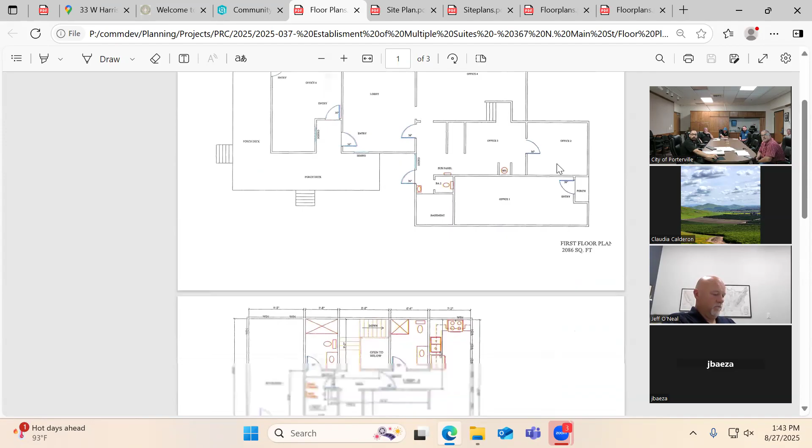Counselor? Yeah, so 1, 2, 3. I know you wanna do residential in the future upstairs. Right. Like I mentioned to you earlier, it will require a rating based off what the code states. I believe it's a 2-hour rating between the commercial downstairs and the residential upstairs.

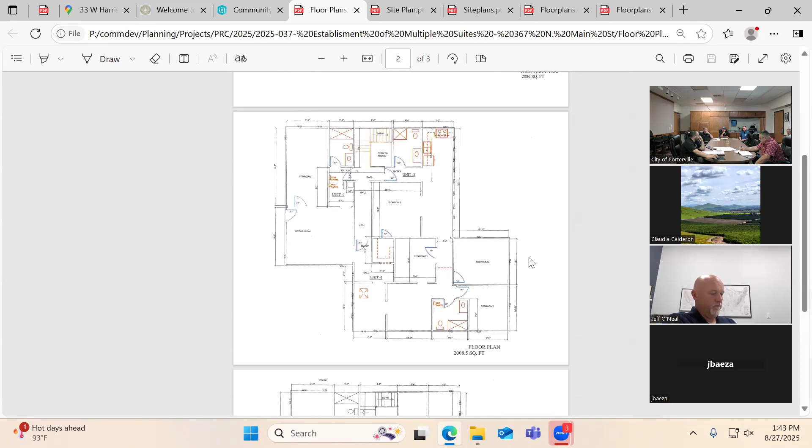Javier, will you help me remember, if he puts 3 residential units upstairs, is he not required to have accessibility? Is it 4 or more? No, it's 3 under the covered roof. Oh, it is 3. Yeah, 4 is for condos.

And then it'll all come down to a hardship analysis on that. So it'll have to be just 2 residents, 2 homes upstairs. Yeah, either put 2 units, or 3 could require you to make it accessible depending on the cost, like he's saying, there may be a hardship waiver. Well, so you could do a waiver?

It'll be a 2... I think when Javier mentions hardship, how much money are you gonna put into making this residential? And then after you get that number, how much is it gonna cost for you to get accessibility to the upper floors, right? Elevator, a lift. There's a few other options in the code. If it's way more money than what you're putting into it to make it residential, then there's a hardship form you can fill out.

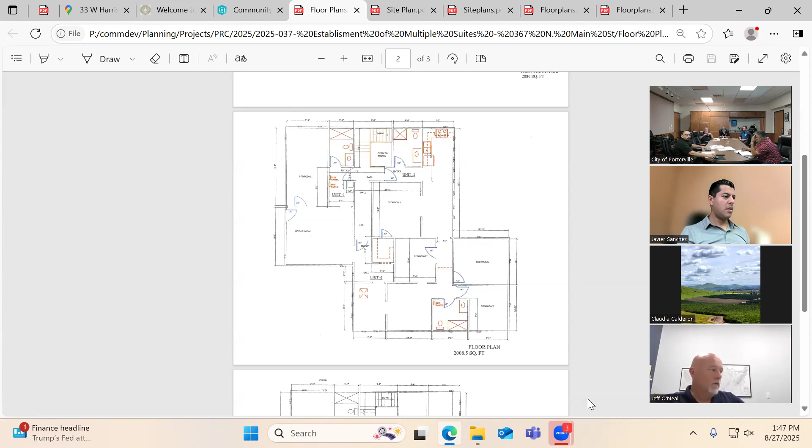Okay, got it. So there might be some examples around town you could look at. I know there was the LULA that was put in for the tax office. LULA is a limited use, limited access elevator. It's not big enough to fit a stretcher, so you have to have a stairway that's accessible with a stretcher, with certain dimensions to get a stretcher up and down. But then you'll have an elevator big enough for a person in a wheelchair, maybe two people, sometimes three, could get in there and go up.

And what they did is they attached it to the exterior of the building. So there are some options that may be affordable. They just did it for a business office, and they were able to get it done. What's the location? That's going to be on Villa and Putnam.

Yeah, if you look at the back wall, you can see the elevator shaft. Go to Villa and Putnam. Yeah, even though they're a whole lot cheaper, but that's too expensive, man.

Well, and like I said, these guys were able to do it just for a business office and it worked for them. They actually put the accessible stairwell on the exterior. Yeah, but that's a little different though, no? Because it's a business upstairs. Well, yeah, but I mean, you say it's just like what you have, it's just a house. They just framed that up and there's a small elevator inside there, and that door is just the elevator room.

And then the stairs, you can see it off of Villa. You can see it better off of Villa side. That cost them what, about 100,000? I have no idea. I don't know the valuation, he would know what the valuation of that project was or could get it, but there's the accessible stairwell right there.

And the reason you've got to have accessible stairs is if there is an emergency, the fire department has to be able to get a fire department stretcher up there. Accessibility stairwell, okay. But if your interior stairwell meets those dimensions, it's fine. They just didn't have an interior stairwell.

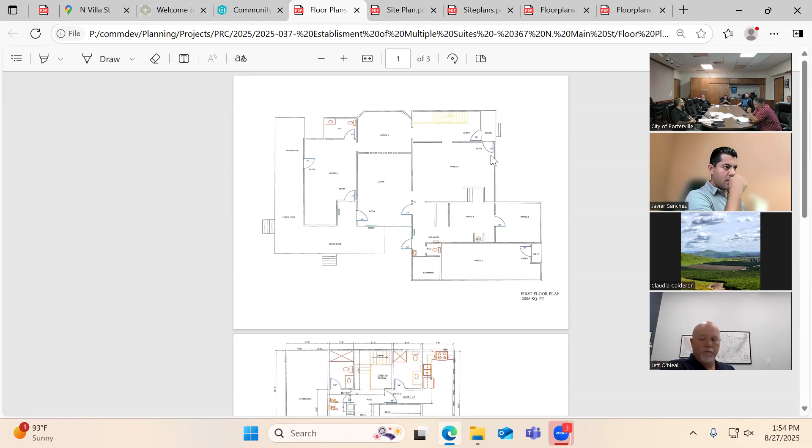Yeah, we'll see what's going to be required, or how much more will it be required to do a 3 instead of a 2. So if it's going to be a whole lot more, well then... So, yeah, I'll deal with it, but if it's about the same, or if there's a way of keeping the requirements the same, whether it is 2 or 3, well then I'd rather go with the 3.

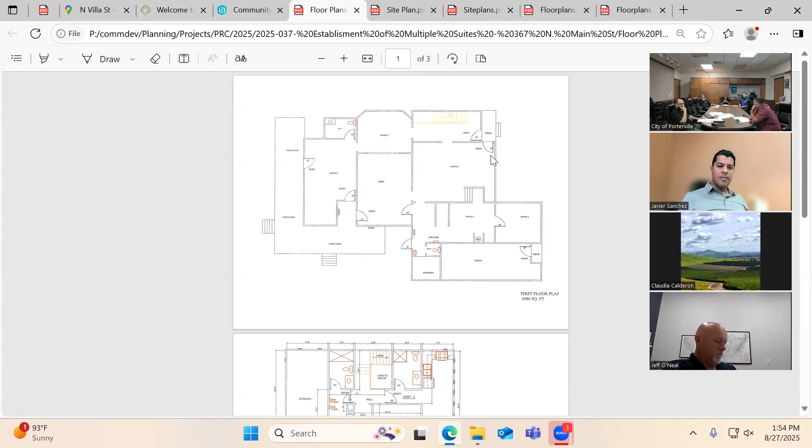Yeah, because there is an option in the code to put in a lift, like a stair lift, chair lift kind of thing. Oh, well then, yeah, we'll do that. You see them at bars or big cities, there's like a chair right there, and then it just has a rail that goes up and they ride it up and then they can get off at the top.

Usually that's an exterior feature, or they have a lift to where it's interior and you set it and you kind of ride up gradually. So yeah, there's some options. I would send you those code sections to help for you and your designer. Yeah, because I would like to get going on that right away.

Yeah, because I got a lot of people, a ton of people calling. But for now, if you want to get the downstairs going, then just comply with the building code. I mean, the permit for filling in the doors and the openings and the parking stuff, to at least at a minimum get the first floor rolling.

And technically, to get tenants in there right now for the commercial on the first floor, fire sprinklers are not required to do that. However, once they get installed, you have displacing your clients and stuff like that for the time being while the work is done.

But ultimately, that's not a requirement to occupy that space downstairs with commercial. The trigger for sprinklers comes when somebody's gonna be sleeping in the building. That's my main concern, getting it occupied. Because right now, the only people occupying it are homeless people.

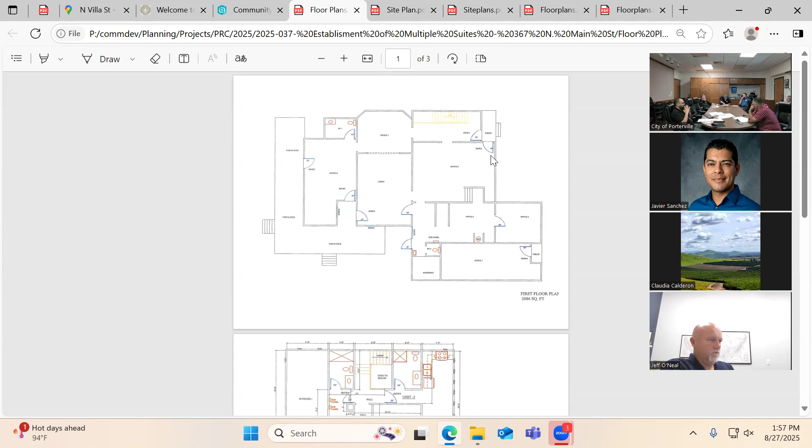Well, we would need the permit, the plan submitted for how it is now versus what you want to do, to separate the suites. Well, right now the suites at the bottom, well, that's the thing, the way we're gonna separate them, that's the way they're gonna be. So you want the plan the way I showed you submitted, that way you can start the construction to actually do the physical separations.

But once you have that permit, I don't think there's anything at that point. Because they'll also have to identify the suites, right? Because we'll need to know, are you going with 1, 2, and 3, or A, B, and C? What are they gonna be considered? So we'll need that stuff identified.

Yeah, because I'm paying $3,000 a month and then no tenants. So the swing is like 10 grand a month. So I think that's the fastest way, get the plan in, pull the permit, and on the plan identify, hey, we're gonna be blocking off this door, closing up this wall, whatever it is, to separate them. They're gonna be suites A, B, and C, or 1, 2, and 3. That's on the plan, and I'm gonna go with a B occupancy or something like that that's consistent. And I don't think there's really any issue.

And that gets you basically into our system. It's on record, business license now, everything's on record. The city has allowed you to turn this into 3 suites. And then you've got like 6 months to final out the building permit.

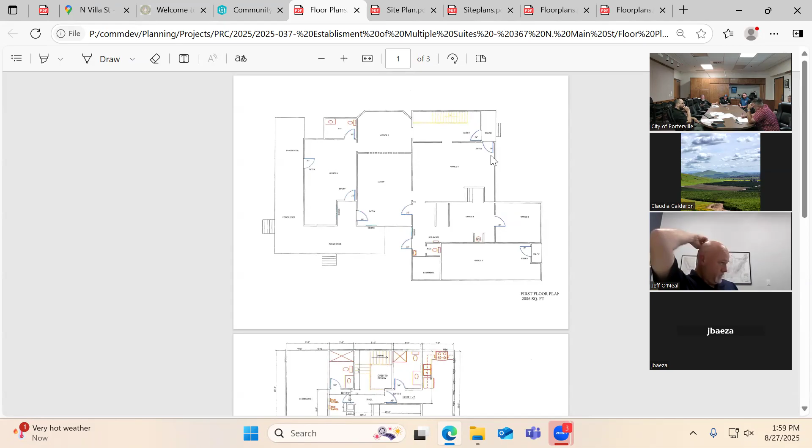People like, I think the quickest thing is talk with your designer, have them get that plan, it's a very simple plan. And then once Javier approves that, we approve it, you get the permit. It's as quick as, hey, if I get these blueprints in, let's say by next Tuesday or Wednesday, how soon will I be able to allow the tenant to move in there?

Well, once the permit gets issued, then you can start doing the work, and we can inspect it as it progresses. There is nothing that says he can't have a tenant in there while he's doing the work separating those suites. So if we issued it, let's say you get it to us by Tuesday or Wednesday, it takes us a week or two to review it, and then we issue you the permit. The same day you go over there with the green card permit, the issued permit, your tenant could be moving in.

Now, they may have to be disrupted while you're framing in that wall to separate them from the other suite, but your construction crew can go in at night and handle that too. Since you've got an active permit, you can coordinate with the tenant: hey, you guys close at 5, cool, I'll have the guys work from 5 to 9, and then come at 5 in the morning and work till you guys open. It shouldn't take that long.

There's nothing that says they can't be there, because you're not doing massive structural changes or huge supports where it's dangerous for someone to be present. You're basically just doing some framing, drywall, and painting.

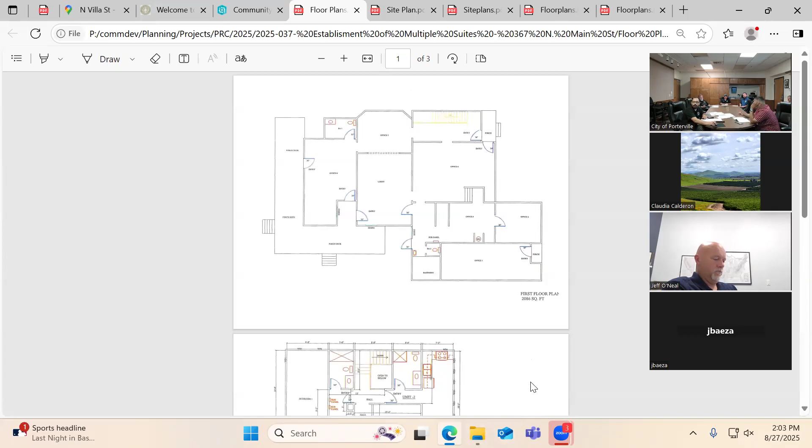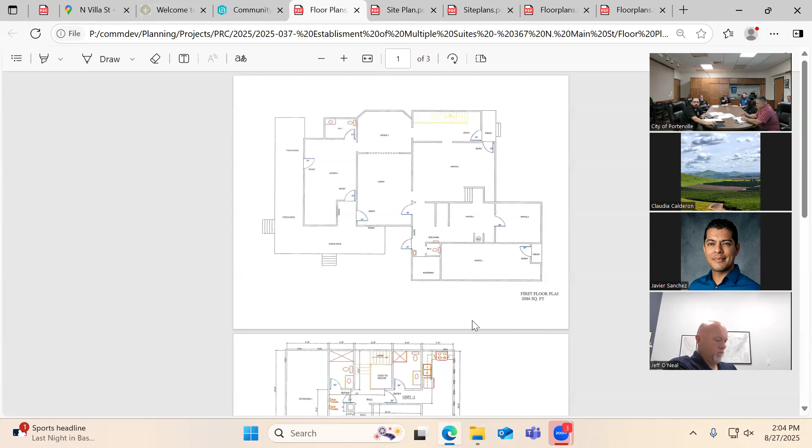Sounds good, moving along with engineering, Javier? For engineering, it depends on how much is spent. We'd evaluate frontage improvements like the drive approach and street lights, they add up quick, so if your remodel isn't too much, you may not be on the hook to do any public improvements. That's all engineering would have.

Thank you, Javier. Next with Public Works, starting with Briana. I don't have any comments. Thank you. This would be residential can service or commercial can service. Commercial cans, okay, thank you. Next with Joe. No comment from streets. Thank you. Next with the police department, with Mark. No comments. Thank you, Mark. And that is all comments.

Oh, no, sorry, David, any comments regarding the water utilities? Yeah, with this being a commercial facility and being in alignment with our new 2025 cross connection control plan, it would need a backflow device on the water service just after the meter. That would be my only comment. Thank you, David.

With that, we'll compile each department's comments in a letter to be sent out to the applicant in 2 to 3 weeks from today's date. Are there any additional questions from the applicant at this time for the city staff? No? Alright, well, we're good. Thank you for the application.

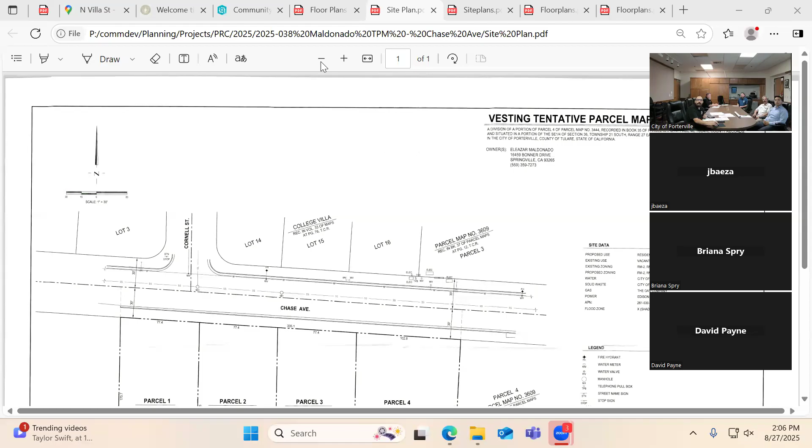All right, so we have the applicant proposing a preliminary residential parcel map to subdivide the existing 1.34 acre property into 4 total parcels for the development of a future multifamily residential project. The property site is located on Chase Avenue, approximately 500 feet west of Plano. The property is split zone with...

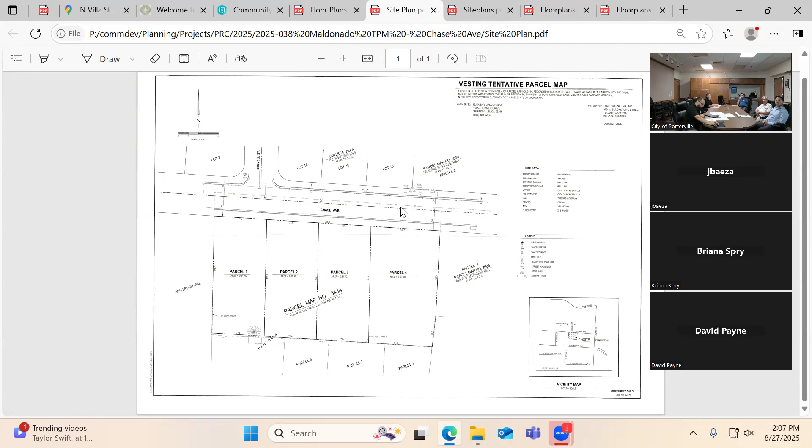RM2 medium density residential and RM3 high density residential. And with the zoning here, so we could go. The zoning here. So yes, the project site is located at APN 261-030-082.

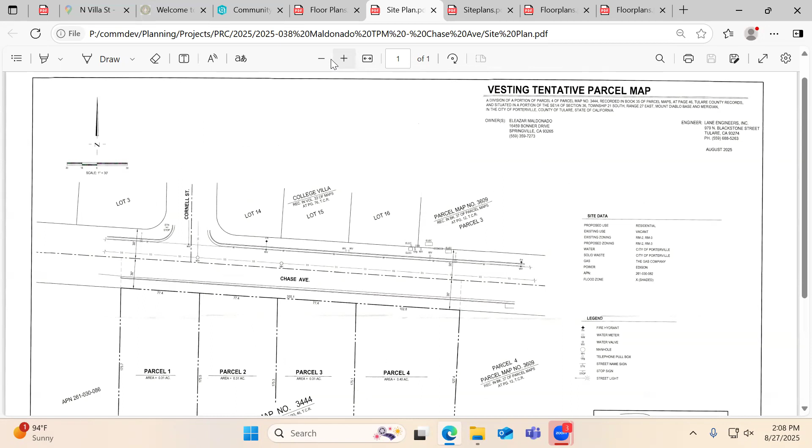As far as comments from planning, the project will require to process a tentative parcel map complying with chapter 402. The tentative parcel map shall be prepared by a registered civil engineer and/or licensed surveyor. There are fees associated with the tentative parcel map. The tentative parcel map fee is $1,500.

It will require an environmental assessment of the project. We can make a preliminary determination for an exemption, in which staff will prepare the notice of exemption for a fee of $79. It will require the environmental document to be filed with Tulare County clerk, and there is a fee of $58 for that.

This project will require parcel map committee, which is a public hearing, in which we'll notify - we'll send a notice to the newspaper and also mail out the notice to the adjacent properties within a 300-foot radius. City can prepare that service for $26.50. I believe you've excluded that already, but in the future, if that changes, we can always provide that service.

Now, once the tentative map is approved, it is good for up to 24 months unless the applicant requests an extension. The tentative map will require a final map, and that fee is $955.

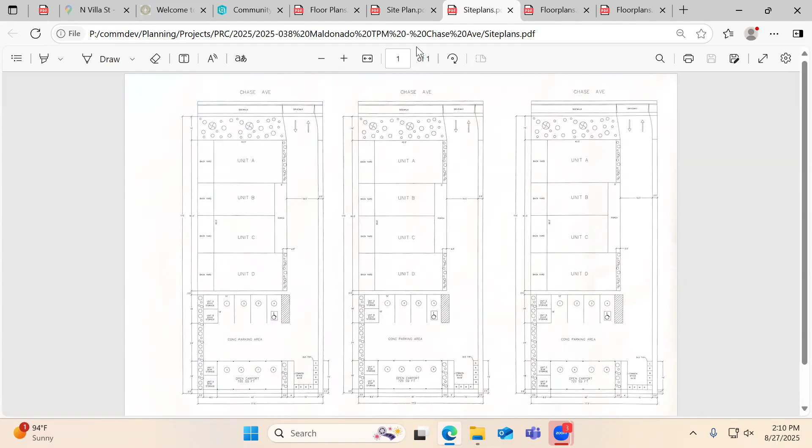Now, you are showing preliminary development of 3 of the parcels, not the 4th one. Are we leaving the 4th parcel not developed? Or would we be mirroring something similar? The larger parcel is probably going to consist of 12 units. If the setbacks and confines allow for it, but as far as the parcel size, based on the zoning, it should accommodate 12 units.

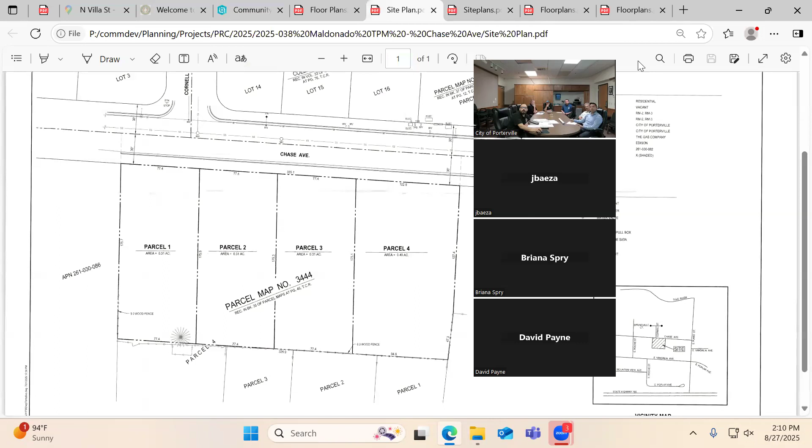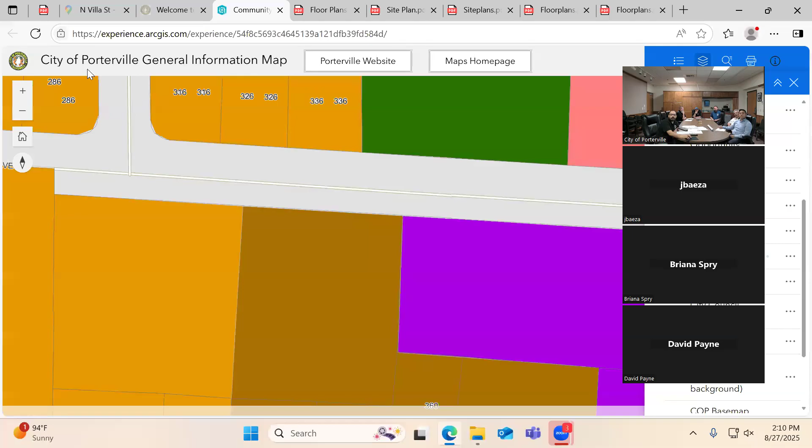Okay, so we're trying to phase into it. Just funds, for sure. Let's see, 0, 2, 1. So I want to see where more or less that zoning changes.

One question, Jeff - would we require the parcel lines to be at that change in zoning? So it looks like half of what would be parcel 3 is going to be medium density, and the other half is going to be high density. As part of the land division, would we require those parcel lines to line up with the zoning?

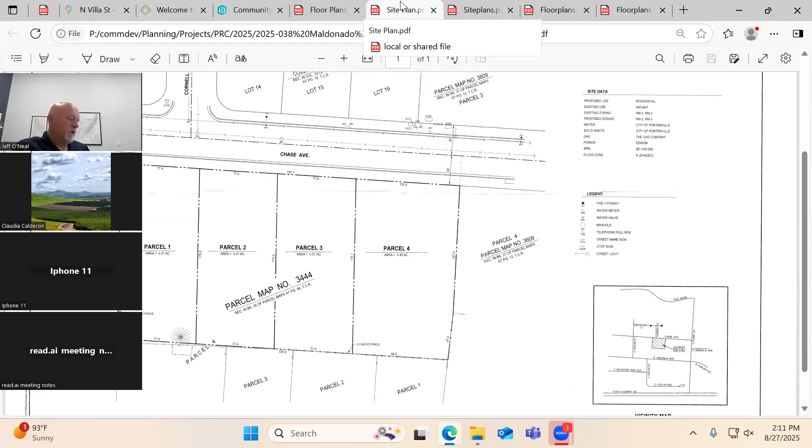I don't think so off the top of my head. We'll do a circle back on that. We can probably do a density bonus on it. Okay, so yeah, let's not jump to that conclusion immediately. We'll circle back on it. No, for sure. All right.

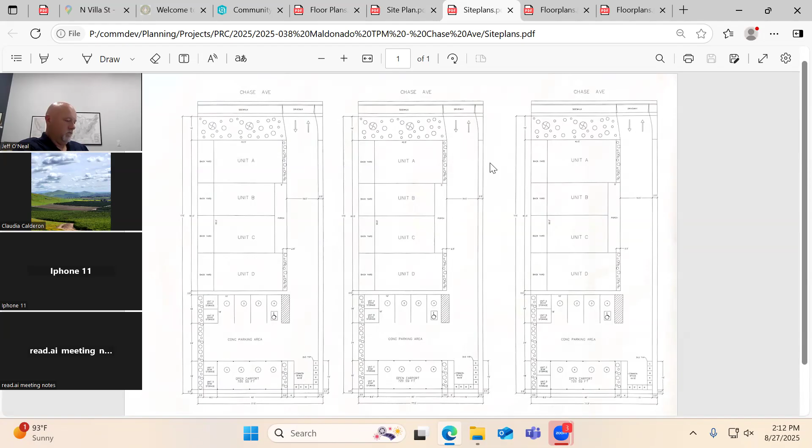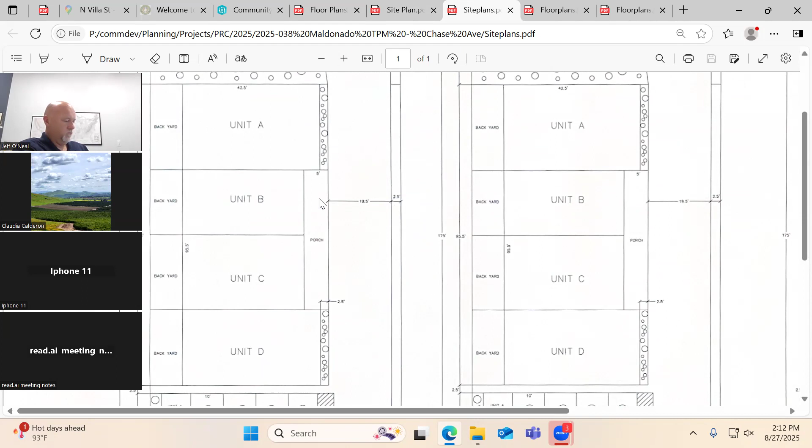As far as the multifamily development within these parcels, it will require to comply with the Porterville development ordinance, specifically chapter 201, which is our residential districts. Just some minor adjustments here - for example, the driveway you're showing at 19.5. Two-way driveways require a minimum of 20 feet wide. The landscaping buffer between the both parcels, you're showing 2.5 feet - it does require to be a minimum of 3 feet. Just minor adjustments here and there.

Parking will require 1 covered parking per unit, in addition to another second open parking per unit. You're showing - let's see - 2 to 3 bedroom units? Okay, and of course those covered parking shall be designated one per apartment.

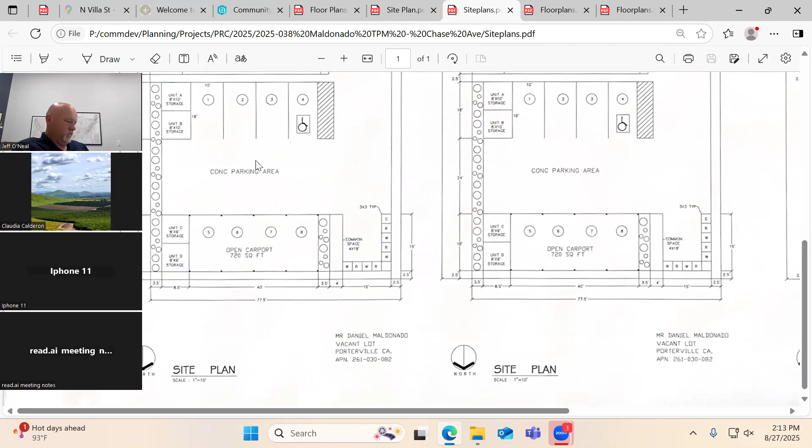It will require private and open space. For the development, you are showing private space, but we just want to make sure that you also show common space. You are showing it here, so we'll make sure that you meet the minimums, which is 100 square feet per unit.

With that area in front of the garbage bin containers or the storage area, would that qualify? Yeah, that area along with that, it would at least have to be landscaped area. Got it.

So one can make just a concrete path along the garbage bin so they can roll them out, and then have landscaping. Yeah, it would have to at least be a 10 by 10 area as outlined in our code. Okay, but yeah, we'll take a look at that for sure.

You are allowed to have signage as part of your multifamily project. Any fencing complying with 300.03. As far as signage, you're allowed one building-mounted sign and one monument sign, not exceeding 32 square feet.

Yeah, that's our preliminary comments based off today's project. So, 20-foot wide driveway, 3-foot setback from the fence line, and landscaping buffer from interior property lines, correct? Because it is a driveway and considered a parking area, we need that buffer.

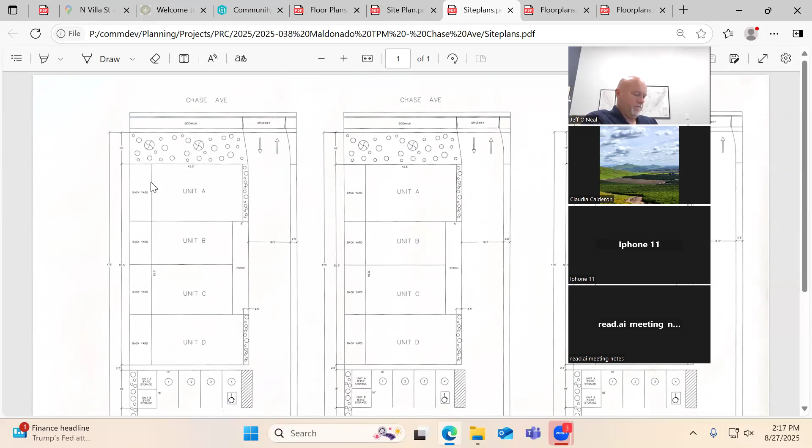Oh, so we can reduce the backyard a little? You would have to at least meet the minimum private open space, which is at least 10 by 10. Got it, so 100 square feet. Yeah, so I'm not sure if you're able to reduce that. I don't see a measurement there, 3.5. I think it's 10 by the unit, so it's like 10 by roughly - yeah, so you may not be able to reduce the backyard.

We'll take a closer look at that and provide our final review comments in the letter. Maybe the quickest and easiest solution is just to take off a foot or two from the buildings to mitigate those two comments. Okay.

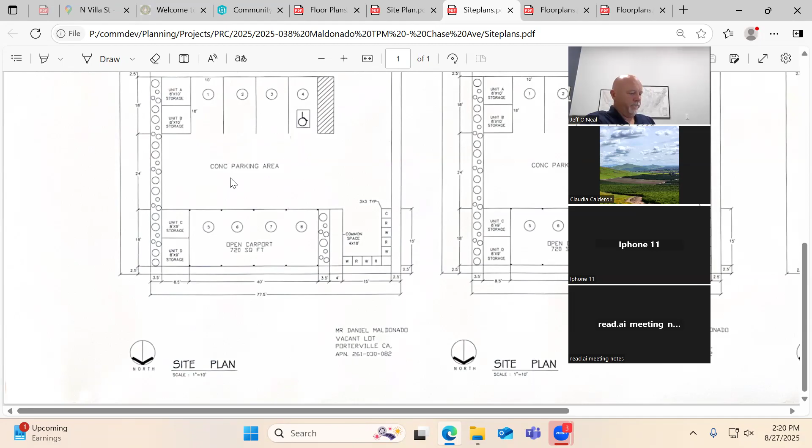With AB 2097, I was wondering if an exemption would allow for that, because we're a little bit constrained by the length of the unit or the space.

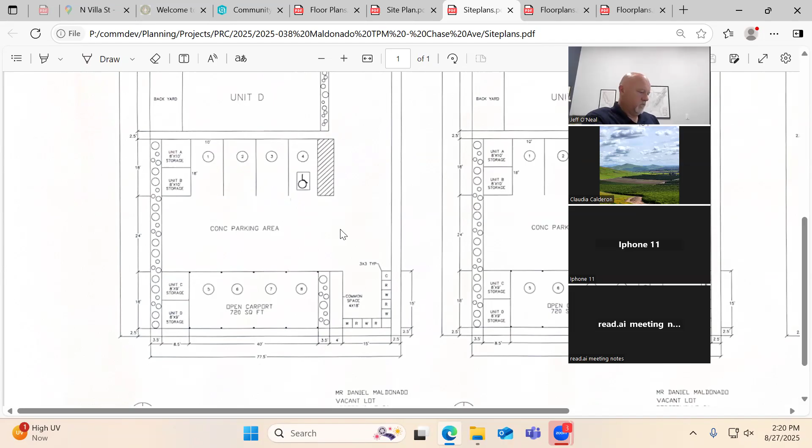You guys need 25, Oscar? Yeah, our code says 25. So not necessarily the 3-point turn, from back of stall to back of stall on opposite side.

So we need an extra foot. Well, what's the setback between the building and the parking? Does that say 2.5 up there? This says 2.5, it would at least have to be 5 feet.

Another comment I just noticed is these storage areas - they do have to be accessible to the units. So you will have to provide some type of internal connectivity between the storage and the units.

I've seen some projects where they'll place them in the backyard of the units, and then they're accessible from the private space. Or if you don't want it popped onto the backyard, I've seen some where they're popped into the building itself, and that could help you save some space from the parking area.

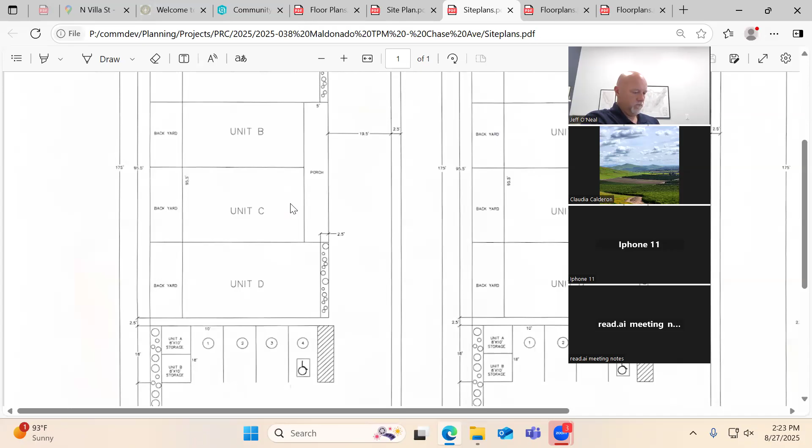Just a quick determination, Jeff - would we need a walkway connecting the storage units to the parking lot units? Because it sounds like they're in a publicly accessible place since they can walk up to them. Correct, so...

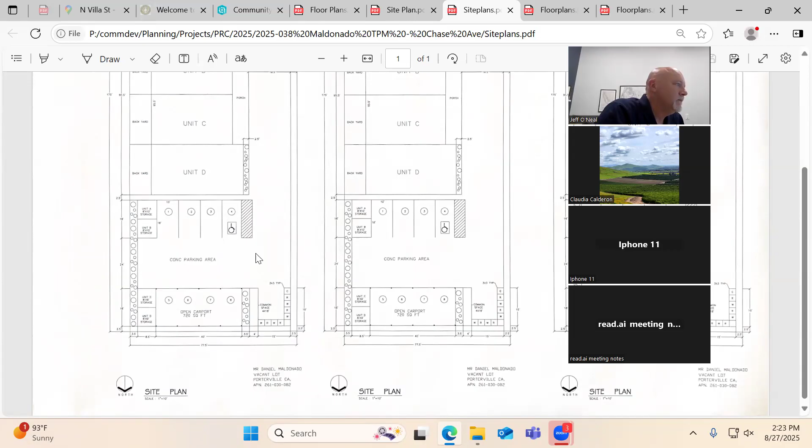Sorry to not have an answer again, I don't know the answer to that off the top of my head.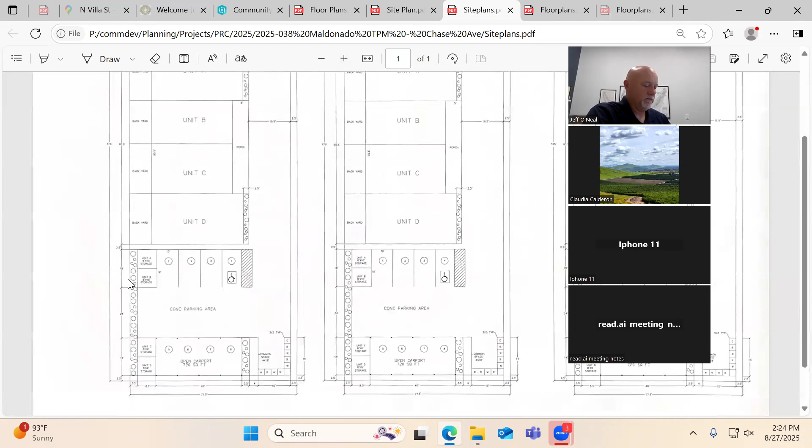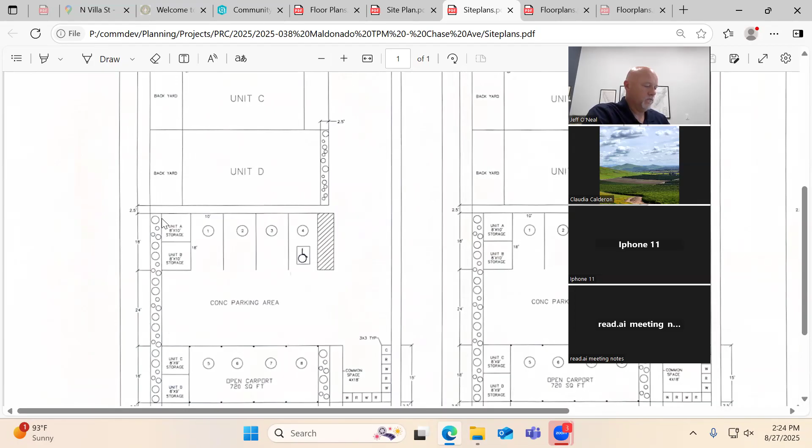Like the interior one would be assigned to - oh yeah, correct, it could be assigned to this person, say unit D, they could access it, they have control of the vehicle. This one, say unit C, a little doorway right here where they could access it directly, same idea across the - yeah. So I don't know about making it like solid structures there, with covers, blocks.

Oscar, can I make a couple comments? Sure, James.

So your stall - hey, if this was a path of travel, you can't block it with a bumper, you'd have to have 4 feet right here.

I think you're fine because you're coming off to the right and going straight. But it should be flush, to get from here to the front door, you can't have a path of travel from this access aisle in a vehicular way. Got it, so it would almost have to be made flush and then made into a pathway.

So would unit D be the one that's accessible? Is that what you guys were thinking? It could be, or we could have a doorway here and then a doorway there. Would the front door have to face a certain way?

Not unit D, because it's in the back. The unit facing the street does have to orientate towards the street. So unit A would have to orientate towards the street, not unit D because it's not the front of the building. But there's nothing to say that on unit A, if they put a front door on the street, that couldn't be a back door off the drive aisle where people go in and out. It just has to have a front door facing the street.

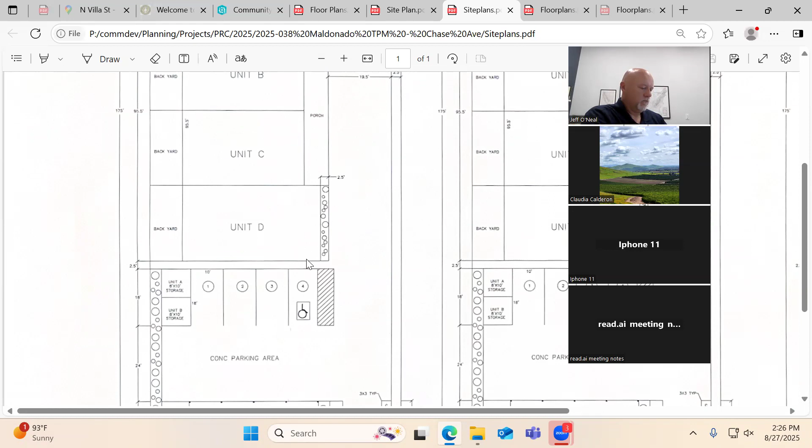Unit A's access would be right there. Well, that would be a secondary access. The primary access for unit A has to face the street, it just has to have a front door. The way the code is worded, it says multifamily development shall orientate toward the right of way. So we'd at least ask unit A to have some type of orientation for the right of way.

Normally they'll have a porch with the entrance. But there's nothing to say where you want to put the door, so that can be a back door that they could actually use to go in and out, because it's closer to the parking.

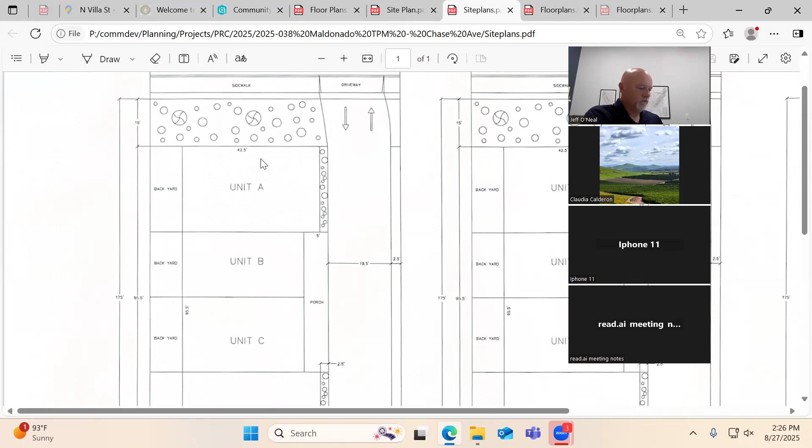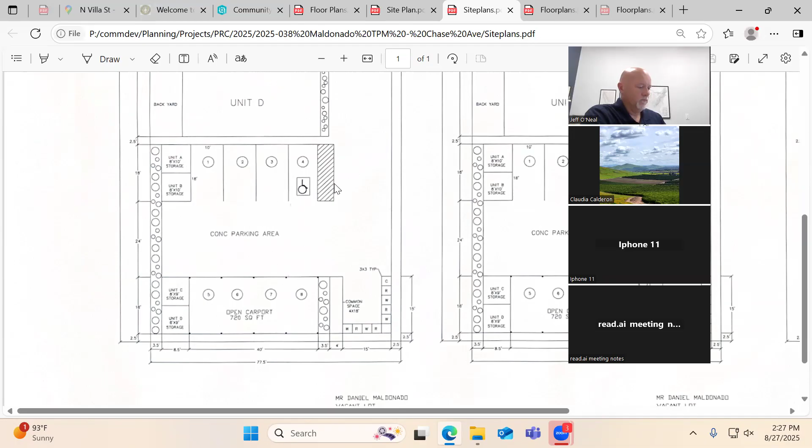Yeah, but I think the more important comment for accessibility would be - Oscar, can you go back up to the parking stall? How do you get from the accessible aisle to the front door of whatever unit you're going to? Is unit D and unit C different floor plans?

The two in the middle are identical, and the plans are the same, it's like a mirror. So if this is unit D, to get to this front door, if this is your access aisle right here, you can't send a person through this traffic.

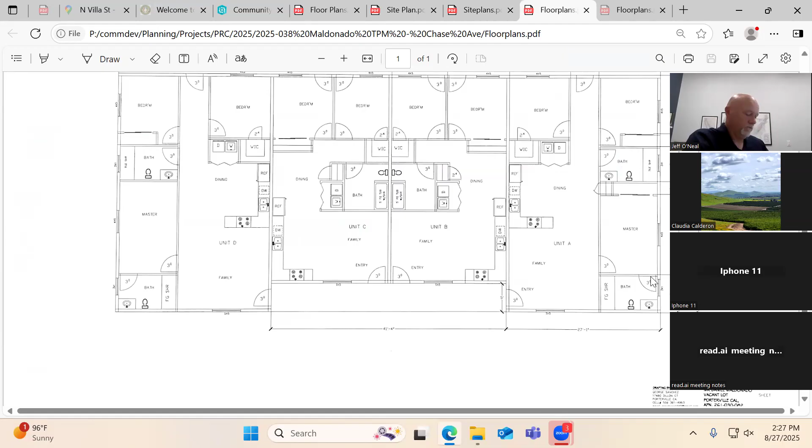So it might ultimately require making use of this, as long as there's a barrier between the vehicle and the patron. But I don't think he's going to get that. He's already going to get 24 feet plus a 3-foot landscape strip.

The other thing I'm thinking about right now - leave it here. So this is the front that faces the street. So you're going to have to flip-flop that probably to get the orientation and have a back door through the bath. But he doesn't have to have a back door.

What you could do is put the big ones back to back, the smaller ones in the back. Make one of them your ADA unit right there by the parking. They come in, they have the door, and the entry for this unit is right here. Then the front one, since it's flipped, their entry door is right there - they can just walk right in. They face the street, they have access to the street, but they also have access to walk right there.

Got it, I didn't think of that. Because a regular person can walk through that, but the ADA can't. So you could potentially still get the same number of bedrooms you're looking for, just by moving the orientation to get what you need for ADA compliance. Good catch there, I didn't even think of that. I was just fixated on giving it up.

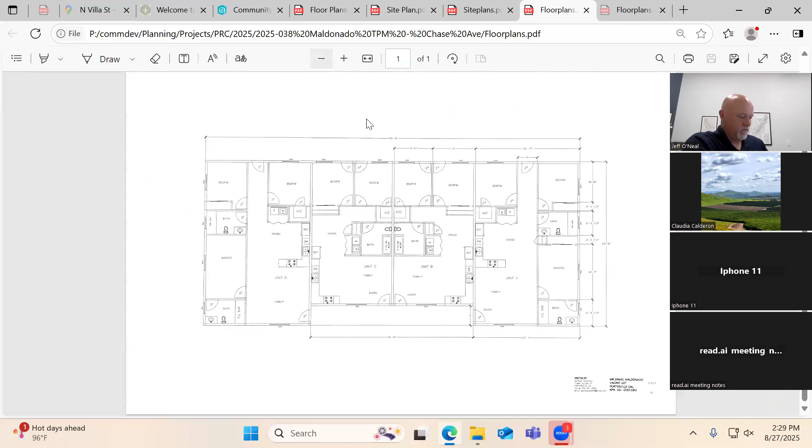Next was fire with James. Basically, we are going to need a minimum of a 20-foot fire department apparatus access, and that is going to have to be a dedicated fire lane - no stopping, standing, or parking.

Realistically, the easiest way to do that is to come in about 150 feet of fire lane from the street, and then at the end of that 150 feet, it's not a fire lane after that. That doesn't require a turnaround because we can back up to 150 feet, but that point on there will get us with hoses the rest of the property that we need to get to. So if we pull the engine in and stop it, we can go ahead and get back there and do what we need to do with the hose pulls from the engine.

It will have to be marked fire lane, no parking, no stopping, no standing, red curb. Do you intend to keep them or sell them?

Keep them. So my thing would be, there is a city ordinance derived from the vehicle code that allows the property owner to additionally put signs stating any unauthorized vehicles on their property will be towed at the owner's expense. That vehicle code also allows you to contract directly with a tow company that has a storage yard within 10 miles, which we have plenty of. You can choose one, and then you basically just give them permission to police your property for you. If their tow trucks want to drive by once or twice a day, if there are any cars parked in that fire lane, they hook them and take them at the owner's expense.

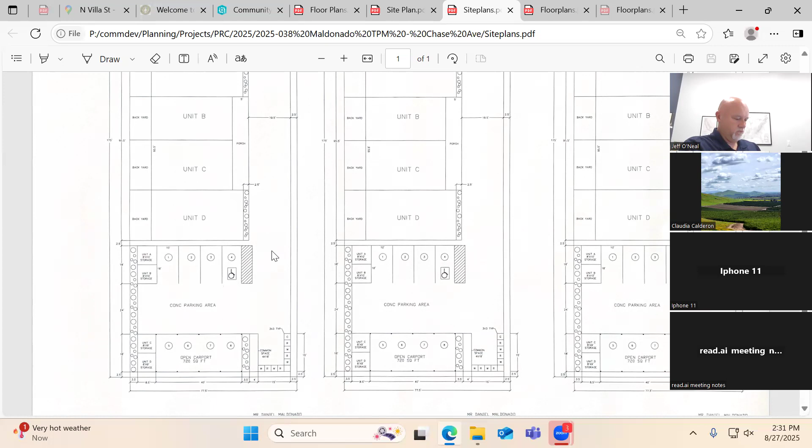I'll give you an example: the code is 22658 of the vehicle code, and then 17-63.2 and 0.3 of the city ordinance. So that will help take care of that and resolve it, and doesn't put a burden on the police and fire departments to have to constantly deal with correcting those things.

So with that said, obviously the buildings will have to be sprinklered, and so you will have to have a fire department connection within 50 feet of a fire hydrant. There will need to be the addition of some hydrants.

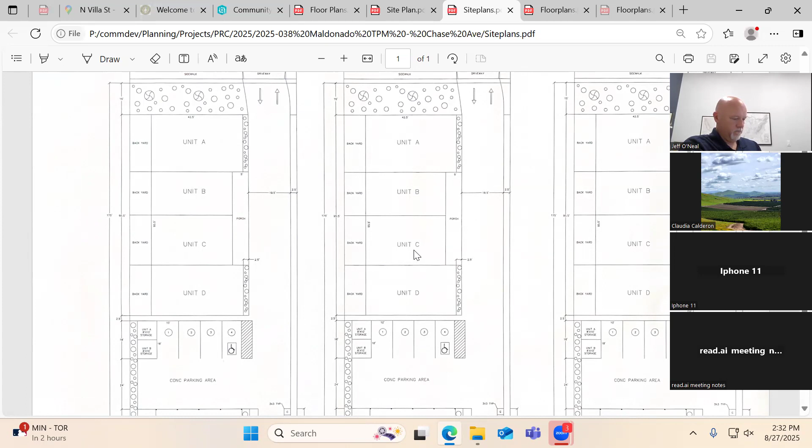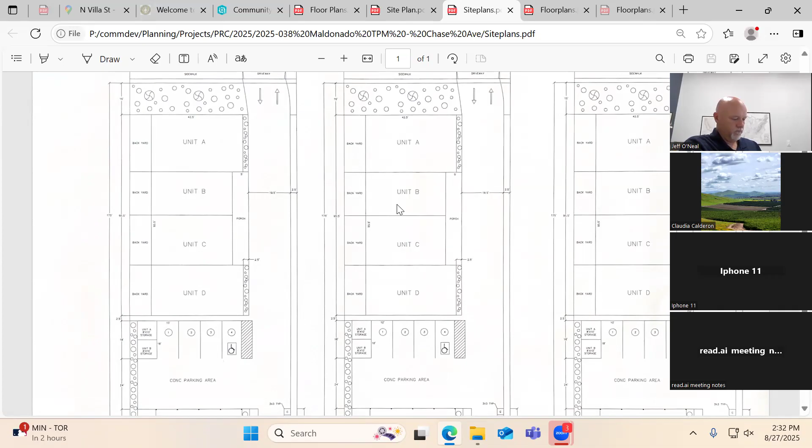Now, one of the things that Oscar and I were talking about was potentially flip-flopping those first two lots, the inside one, so that they have a common driveway. That could get you some more space to do the things you need to do, because you still only need the 20-foot entrance. But by combining their entrance, you now gain some stuff to play around with and move things that you need to do there.

Alternatively, that last fourplex may have an entrance that shares with that 12-plex, because they're going to be under the same ownership, similar to these - see how you've got the two facing with the single entry? Same idea, only difference is you'll have parking on the end of those. So that gives you the benefit of not having to cut here, cut here, cut here. If I flip-flop them, now I have one shared driveway, and I get to use the other driveway's square footage.

Say 50 years down the road, we're no longer the owners - is there like an easement? Yes, you'll have that as part of your parcel map - you'll record an easement for access, maybe utilities, and it'll stay recorded with the property.

Will that make it less costly for utilities, running it in the same line? Potentially, because you'd have one sewer line now for 8 units. So it'd be one bill? Well, it could be, I don't know, we'll get to the sewer department - I'm getting out of my lane, I don't want to get too far out of my head.

But by doing this, you'll see, you're not going to have garages, so that center will be no stopping, standing or parking, like those cars that you see there - they shouldn't be parked like that. And that's why I'm saying if you had those signs up, you could have a tow truck company go by there and haul those things away.

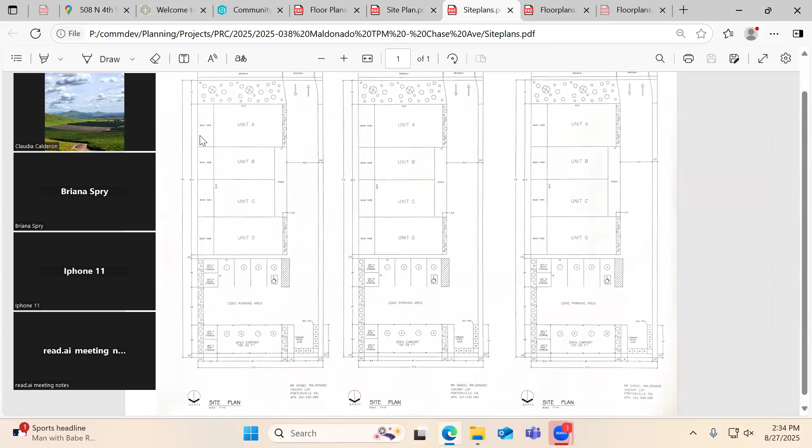So again, sprinklered fire department connection within 50 feet, fire extinguishers per the fire code and California Code of Regulations, basically 75-foot travel distance. And the fire sprinkler systems have to be monitored. So all of the plans, underground, fire sprinklers, fire alarm, all of that is submitted at the same time building plans are submitted. So there's no deferred items. Everything has to come in as a complete package, but you only submit everything to the building division, so that makes it a little easier.

Do you have any questions regarding fire? If you do, I can show you how we do measurements after this and go over some stuff too.

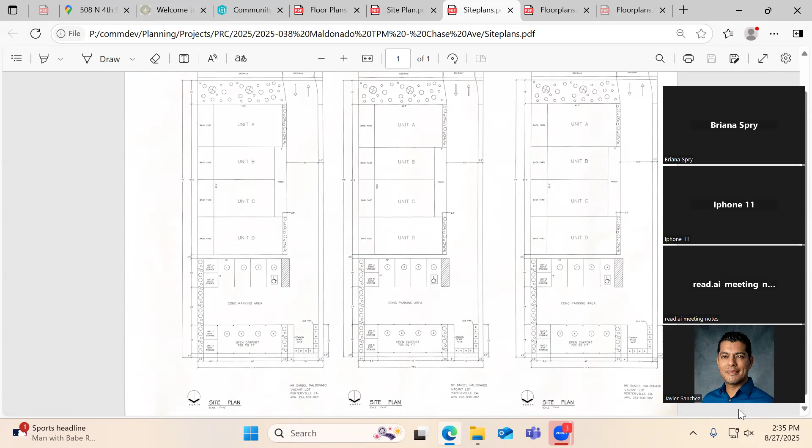Sure, do you know where the fire hydrants would be? So what we would do is find the existing fire hydrants at that location, and then take measurements from there. In single-family residential and duplexes, you're allowed one hydrant every 500 feet. But in multifamily, commercial, and mixed use, the maximum spacing is 300 feet. So you'll probably have to put in a few fire hydrants right there to get the distances.

Would any across the street count? We don't count hydrants across the street. We will use them, but we don't count them to meet your fire flow or your connectability to a fire department connection. So essentially what we do is look at that one there, then space out those and look at your project to see where we're going to put the FDCs and everything else. We can go over that design too.

Yeah, that makes sense. Okay, alright, move on to building. Thank you, I think I covered it.

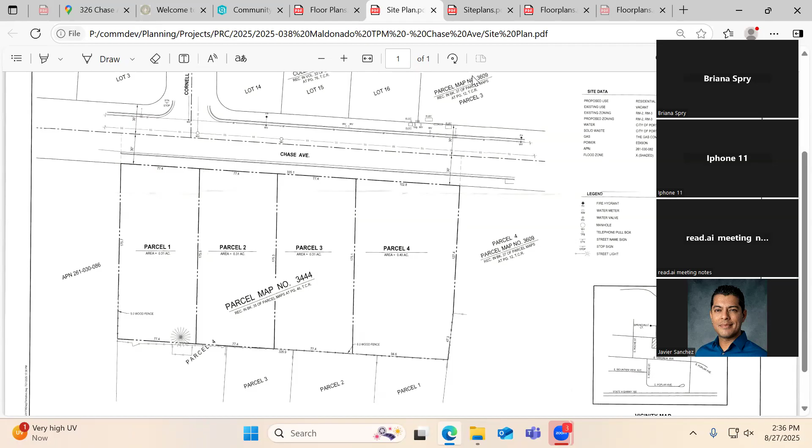I guess besides making sure at least one of the units per property meets Chapter 11A of the building code - fully accessible bathroom with the turnaround access and hallway.

Yeah, that was what I was going to lead up to. If you want to look at the floor plan - the backyards, they're considered not private, so would that need to be 5 feet, I believe? The door, the hallway, because I saw something - you need a T, like a T if you're... so is the backyard just concrete?

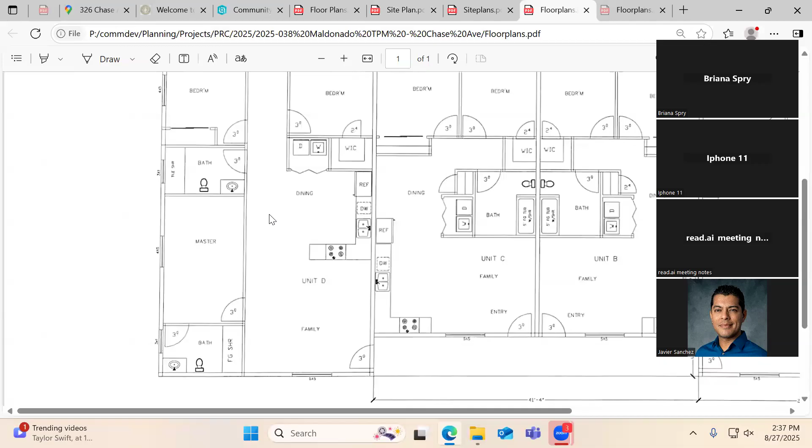Could this be reduced to the normal 3 feet because this is private, not common area? Right, and if I recall, you only need 36 inches. Yeah, because we could gain about 3 feet right there, and that could probably give us the foot that we need for the 25, and we might have to move around a little for the planter, the 3-foot planter.

That's another, what, 6 inches? So if we can reduce that, those 3 feet would give us - what are you showing now? 5. No, because it's private, I'm pretty sure it's 3. I'd have to look again, but I think it's only 3 feet. And then your door opening, once it's open, has to be a minimum of 32 inches. So in a nutshell, a 3-foot door complies.

Javier might remember the width of the hallway, but I think it's 3 feet. Yeah, I know if it goes to common area it has to be 5 feet - at least that's what I read. But if it's outside common area, it's 3 feet.

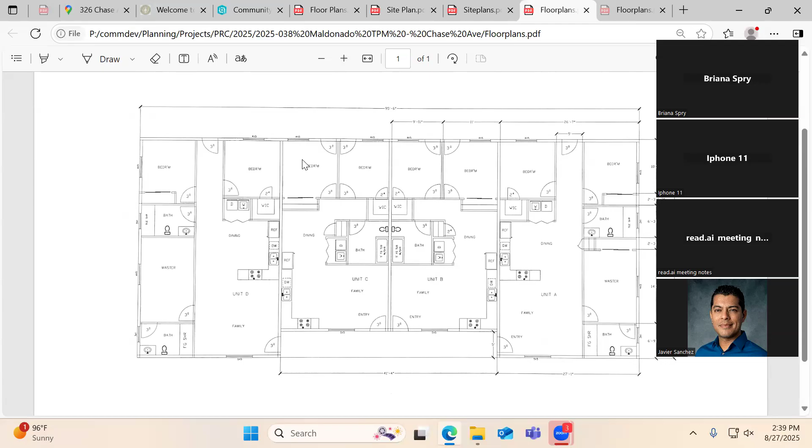There's only a few areas in the code that are turnaround areas, and we're not utilizing HUD or loans or anything, so we don't have to comply with those. Javier, help me out if I misspoke. No, you're good.

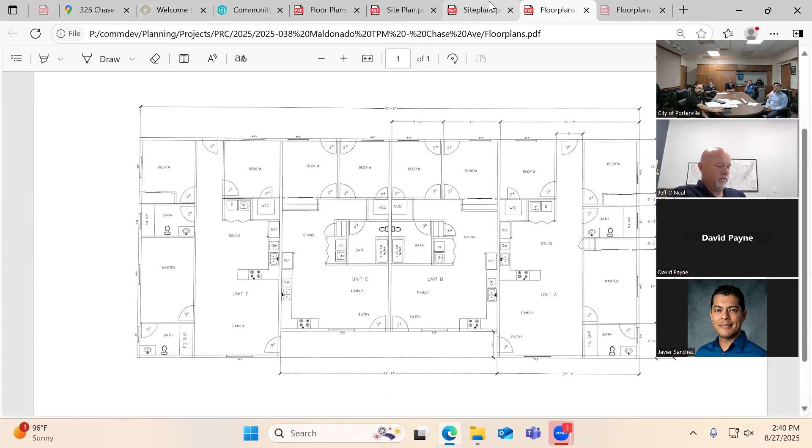Right, with that, Javier, do you have any questions? Any comments on the project regarding the land division and the development of each lot?

Just that improvements will be required as each lot develops. From the previous comments we gave, I know there is one streetlight location that was needed. But that's really the extent of the engineering's comments.

One other thing, in developing the sidewalk and the curb and gutter planters. I think there's already curb and gutter there, just dirty. But in developing the sidewalk and the planters, for the curb cut, our concern is building out the actual curb but then having trucks enter and breaking those during construction. Could we build everything out and leave out the actual driveway approach?

Our concern is having a driveway approach there and then during construction having those break. So we're hoping we can develop everything else out and omit the driveway approach until construction is completed — the very last part, if you will, until all the big trucks are basically done going in.

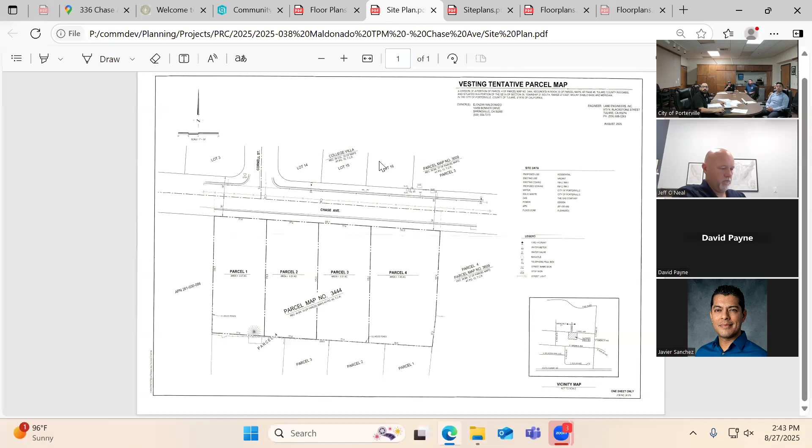No comments from water at this time. Thank you, David. Next, with Briana for refuse. I have no comments.

Would this be served by residential can service, Briana? Yeah, this would be all can service since they're all different lots. The only thing I'd be a little concerned about was how far they have to walk to store the extra containers. I can see the containers being left out on the street a lot of the time, which is against city code. Could we hire one of the tenants to pay them to do it?

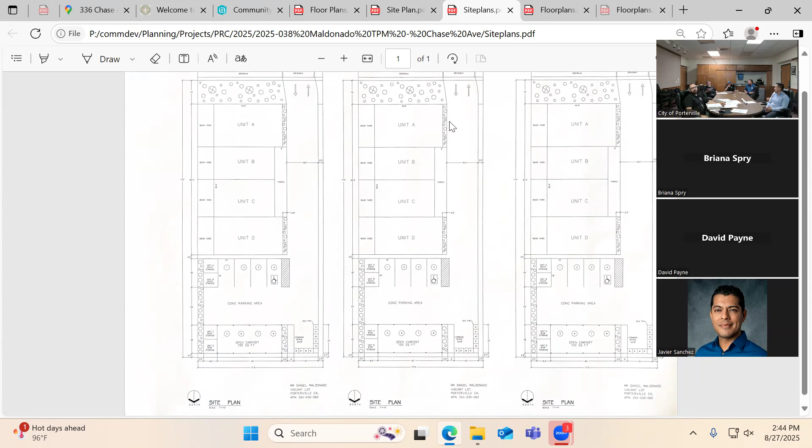I think her point is just making sure they're aware they've got to bring the cans back in every day, not leave them in the lot. There's nothing that says you can't give one of the tenants a $50 a month break to make sure they pull the cans back for everybody after they've been emptied. It's incumbent upon each tenant to put them out if they're full, but one person is responsible for making sure they all get back. That's a great job for a teenager if there's one living there.

Okay, thank you, Briana. Oh, I might go do — I can drive by there once a week, ride my electric bike, see some. Next with Joe.

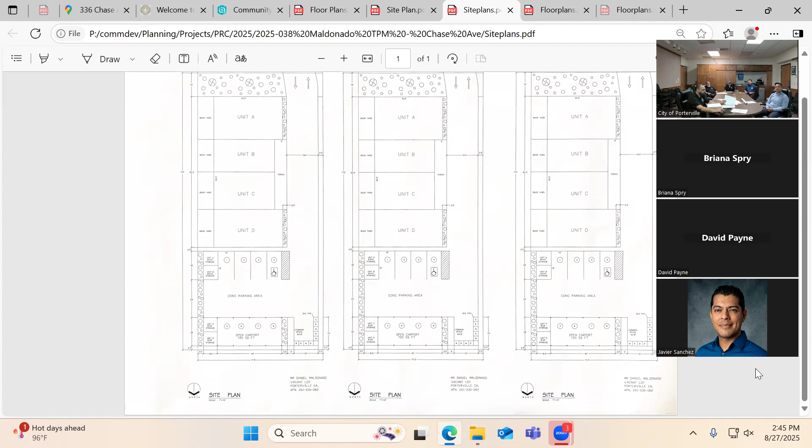No comments from streets. Thank you. Next was police department with Mark. No comments. Thank you, Mark.

Looks like that's all preliminary comments from city staff at this time. As stated on the previous project, we'll compile each department's comments in a letter and provide it to the applicant in about 2 to 3 weeks' time frame.

Are there any other comments from the applicant at this time? I think that covers it. As far as the other questions, we'll verify that, do a little more research, and then provide information on the solar system minimum — do you know if it's a kilowatt figure? I can get you that information in the comment letter.

Okay, thanks. And anytime between now and then, feel free to reach out to staff and we'll be able to assist you with any questions you may have. Okay, all right, sounds good.